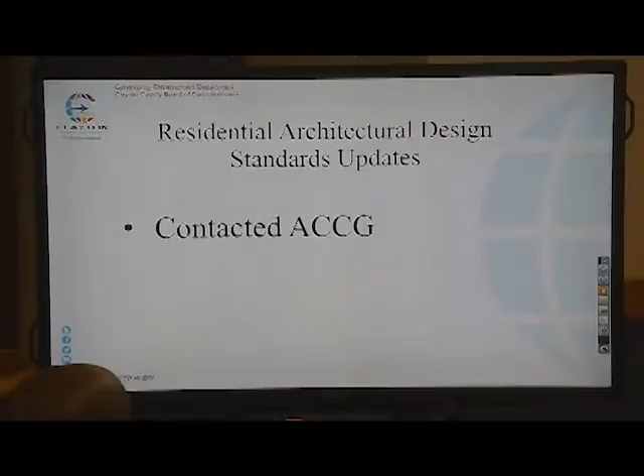Thank you. My next slide is just an update. In the last meeting about ACCG, we contacted them, and in our discussions they shared that they do not get into local jurisdictions' decisions about what they can allow or not allow. All they do is try to make sure the state doesn't pass anything stringent that would prevent commissioners from regulating their own county the way they want. So that was good news, because last time this came up, we had not yet contacted them.

We actually spoke to Todd Edwards, the Deputy Legislative Director. He said the Board of Commissioners has a right to regulate the county the way they see fit, and that they only intervene when the state wants to put in something stringent that limits what you'll do.

So with that, we would like to advertise the residential and architectural standards that we presented to you previously, and it will come to a regular board hearing for approval.

Did you speak with the policy advisor? Todd is one of the folks, but there's a policy committee through the association that has been working on this. The specific ask was to contact them so we can see where they are in that policy proposal, so we're aware as we move forward.

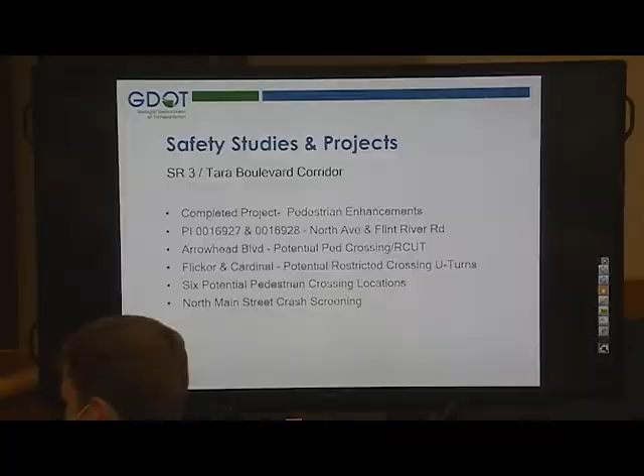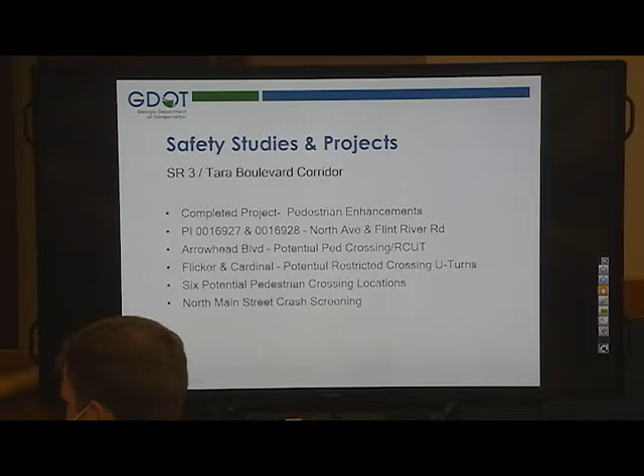There's also 6 additional pedestrian crossings in addition to that Arrowhead Boulevard one that I mentioned that we have designed out, studied, ready to go. I put that study just this week into your engineer's hands so that they can look at it. Again, I don't want to jump the gun on them. I want to give them a chance to give comments on that design and the study, but we're ready to move on those soon. And then there's also the North Main Street crash screening that we did in response to the recent sad fatality that we had out there, the off-duty police officer. So that's kind of a brief overview of crashes and projects we have scheduled to try and counteract them.

This is a good spot to pause before we dive into any of them.

Well, none of what I've seen mentioned lighting. Is that part of the package? Lighting did end up, I believe, on a road safety audit for the corridor that we did.

Lighting is mentioned as an overall corridor improvement. It was brought up as part of an analysis we did for North Main Street as well. I didn't put it in the slides tonight because I personally wasn't 100%, but it's being deliberated strongly, and I just had a conversation today with someone in our state office who can help assign funds.

They're confident that if lighting is something we want to pursue, the county needs to recognize that lighting does have to be paid for, not necessarily install costs, but power costs and maintenance costs by the county. That's usually one of the things that holds up some lighting projects, but we're confident we can start discussing how to get that done.

I'm good in saying that, right, Paul? Well, in my opinion, there are certain areas that definitely can benefit by having some additional lights.

I know for sure there were two mornings when I walked into the office and it was a very similar scenario. A pedestrian was walking along the roadway, wasn't able to be on a sidewalk, and somehow got clipped by a car, and they were both in dark conditions. So we certainly recognize that as a need.

It's not a programmed project by any means at this point, but we can pursue it, and I'm going to write it down right now. Fine with that. Absolutely, sidewalks and lights, absolutely. Paul might have to write it down.

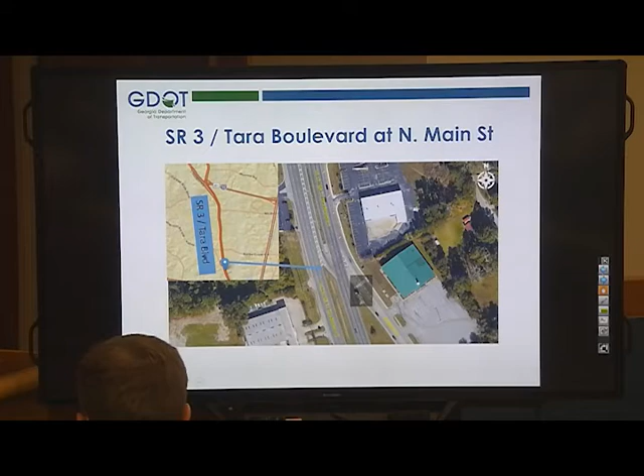So this is State Route 3 at North Main Street, where we had the fatality of the off-duty police officer recently. This is just a picture of the intersection to orient folks here.

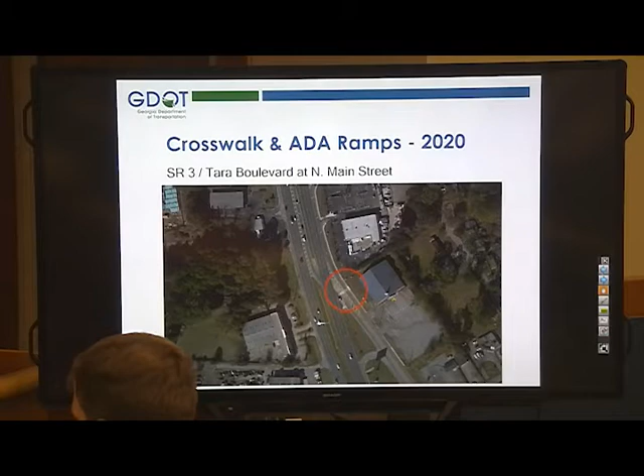This is one of the enhancements I was talking about. We installed curb cut ramps in that concrete island so someone in a wheelchair could navigate it easier, as well as extra striping. There are also signs, not really visible here, that better notify drivers of that crossing. This will not address the crash that happened recently, or many of the severe crashes that take place, but it should hopefully prevent future pedestrian crashes.

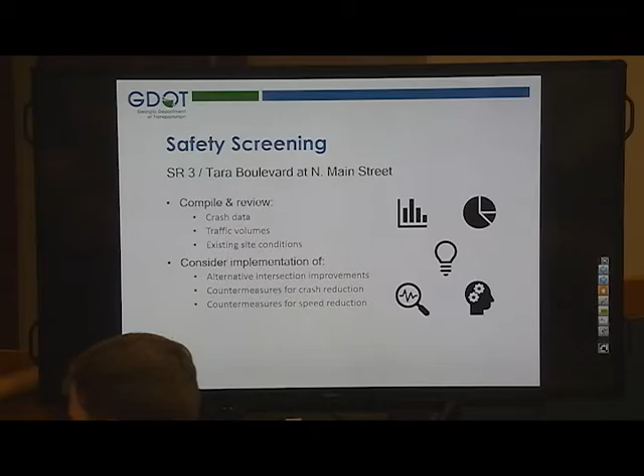This was a safety screening we did. I want to be clear, it's not what we typically call a traffic engineering study that results in a final recommendation. It looks at things like crash data, traffic volumes, and overall intersection conditions to identify feasible solutions and their potential benefits, so we can scope the study we're about to write, and present them to folks like you, to see what you're most interested in pursuing.

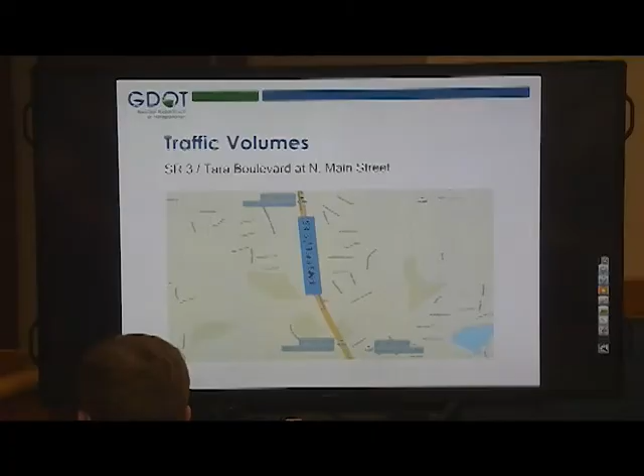So to give you some context on the corridor, I love that you mentioned it's US 19/41. The first time I noticed that on Tara Boulevard, I realized it's literally the same US route as 400, which is pretty telling. Here you can see some of the volumes on the corridor.

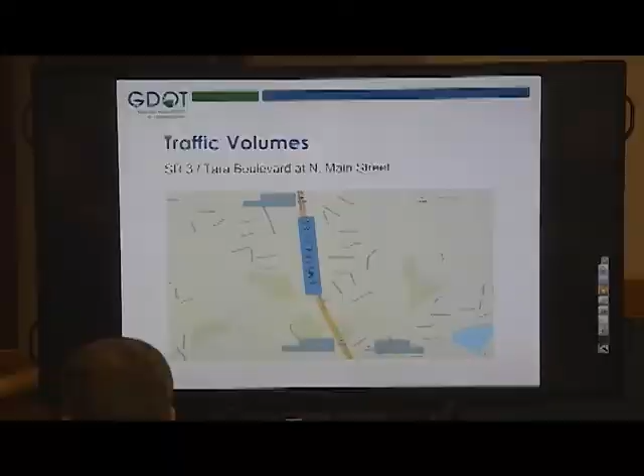On the bottom you see 58,000 average annual daily traffic. On the top it shows 45,000, but I looked into that and that one was a summer count. So we're actually right around 65,000 plus vehicles on this corridor on a single weekday. For relevance, North Main Street is at about 8,000 vehicles per day, which tells you the comparison. 8,000 seems small, but that's above what we'd consider a significant corridor—under 6,000 is a very small road to us, but once you're over 6,000 it's significant enough to accommodate for.

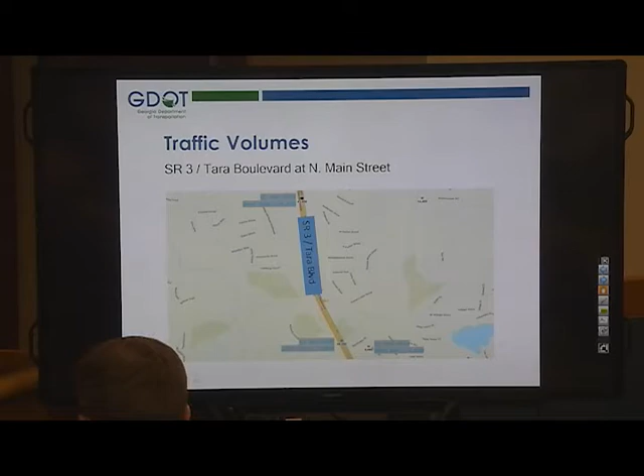On the next slide, here's a crash diagram that we did of the corridor.

There's some things I'd like to highlight. First, you can see they're trying to show little pictures, angles of each crash.

You'll see towards the middle a 32 with the angle crash that shows a left turning vehicle coming southbound on Tara and turning onto North Main Street. One of those was a fatal, the fatal that we all know about, I think.

Also going northbound, there was a rear end crash where you see the 9, and there was a fatal there. We've also got 21 rear end crashes coming on North Main Street, so that's just vehicles trying to merge from North Main into Tara. That's a lot of rear end crashes, a high percentage of the total.

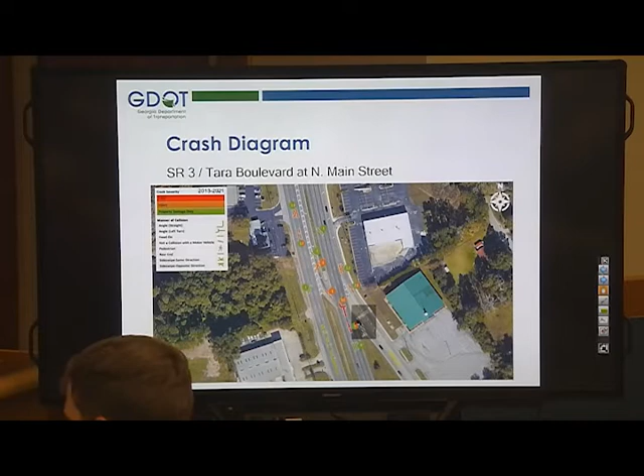There's also a decent number, 12 side crashes just from North Main Street trying to make that merge. That's them having trouble making that right turn into traffic.

On the next slide, here's some more crash data. You'll see there's 32 angles, which is probably around what we'd expect for an average intersection as far as total percentage, and about 118 crashes observed over these 8 or so years.

You'll see 47 were rear end, so that's a significant proportion, especially considering we don't even have a mainline stop here. That's just a lot of vehicles having rear end crashes. And then the side swipes we mentioned as well, just from those right turn mergers.

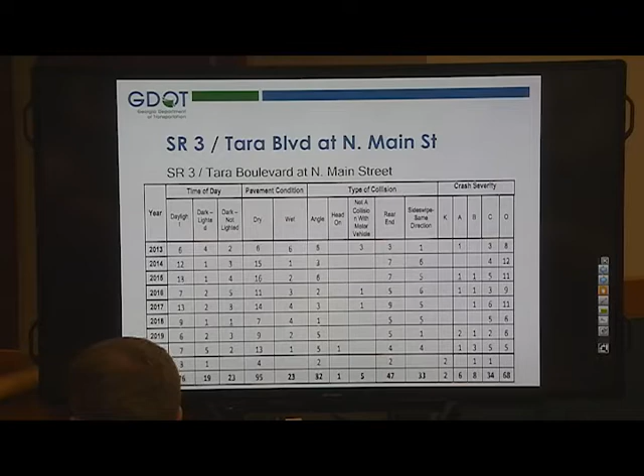So it's showing what that problem is, which I think if you drive the intersection, that's what I feel are the problems. Hopefully we're finally onto some proposed solutions on the next slide.

Some short-term, no-brainer solutions. There's not really any reason to deliberate over these, and they can be installed fairly quickly.

First, we can convert the North Main Street. It's currently a yield-controlled movement. You hop into that lane that eventually, very quickly, is a right turn lane you're forced out of. I drove it semi-recently, almost by mistake - I was always on Tara on the main line, but happened to be on North Main and made that right turn, and that right turn pops up at you.

So what this would do is force cars making that right turn to stop. It would not allow them into that right turn lane and force them to make a conscious decision to enter traffic, as opposed to getting up to speed and hoping they can fit in later. That should reduce those side swipe crashes, and hopefully reduce some of those rear end crashes as well.

We've also got the speed reduction feedback signs we're hoping to place around the district. We've got those on order now, and would place them periodically throughout the district. It would just tell people when they're driving too fast.

Our goal, knowing that when you place those things and leave them for 2 years people start ignoring them, is to place them, pick them up, and place them again, just to keep people guessing. Certainly law enforcement, if they have any speed feedback signs, we would encourage and work with y'all on placement of those.

Long term, and probably the things that are really going to address these problems, we have four ideas. I'll hit them quick and then individually. We could close the southbound left turn lane and still allow the right in, right out at North Main Street.

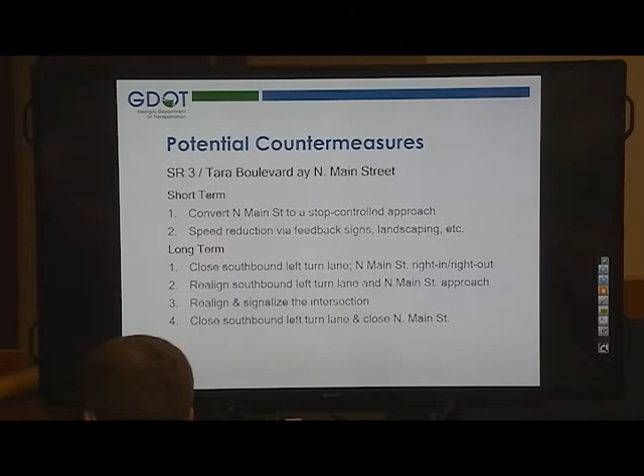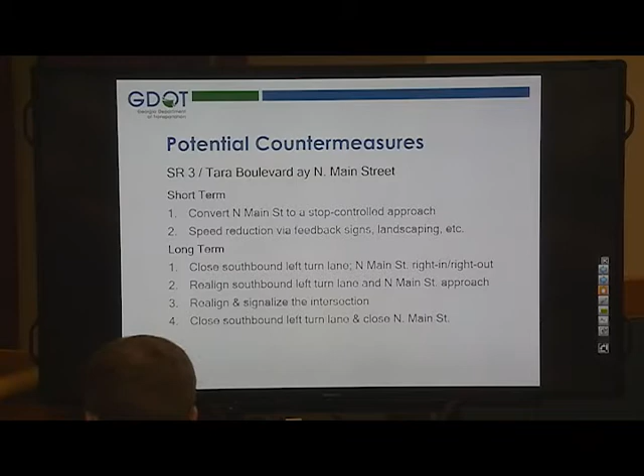We could realign this whole intersection a little further to the south, which would again make that right turn from North Main Street more of a conscious decision, as well as allow the left turners more visibility. We could also realign the intersection and signalize it. And finally, we could consider closing both the left turn and North Main Street outright. We'll jump into each of those on the next slide.

Before you go to the next slide, on the considerations, is there a process for consideration for the realign or closing it? Does that come from the board?

It would be primarily, for our side, a traffic engineering study that would analyze a lot more than what we've brought today, but certainly the board, if y'all wanted to sit down as a county and discuss and talk about what you feel are feasible solutions, we could eliminate a solution based on that, or possibly put some preference to a solution depending.

Based on the cost of some of these future long-term countermeasures, we will need buy-in from the public because we're doing realignments and potentially closing off some approaches. This would turn into more of a longer-term project, so that's something we'll coordinate on with county staff.

Okay, thank you. We're going to skip ahead to Flicker and Cardinal. If you go forward about four slides, we can talk more about those solutions.

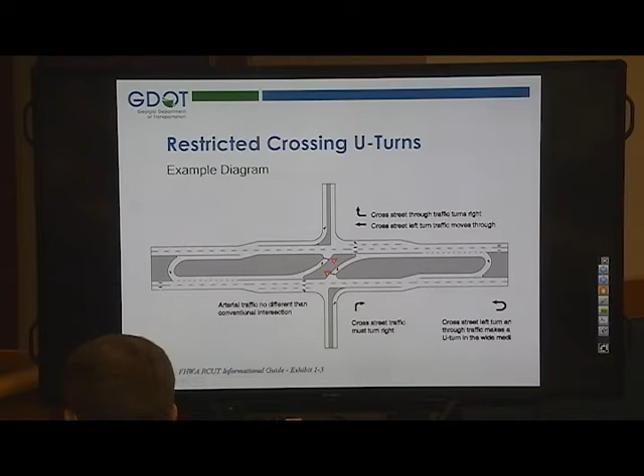If you need to go across, you turn right, make a U-turn, then turn right again. That's what we're about to discuss at these two intersections, more toward the south of the corridor on Tara, in a residential area between Tara Road and McDonough Road: Flicker and Cardinal. Both are existing full access median openings, meaning you can turn left off and left onto the corridor.

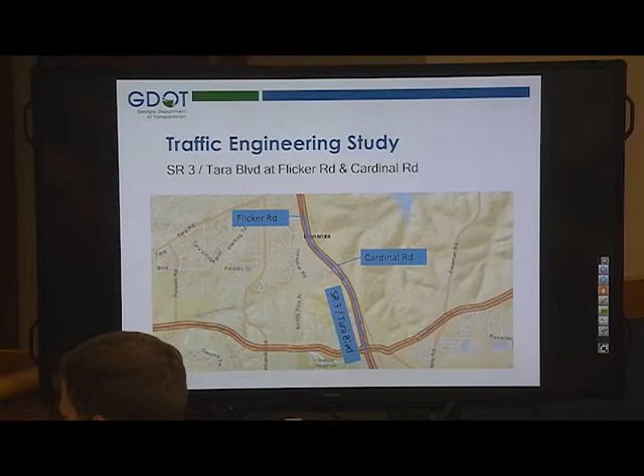On the next slide we have one of the designs—this is Flicker Road, and you can see it's actually a very simple modification. We're just going to take a little bit of concrete and put it in the middle of the intersection to prevent those left turners, and round out the nose points on the medians to discourage the left turn across. It would still allow vehicles currently southbound on Tara to make a left turn or U-turn there.

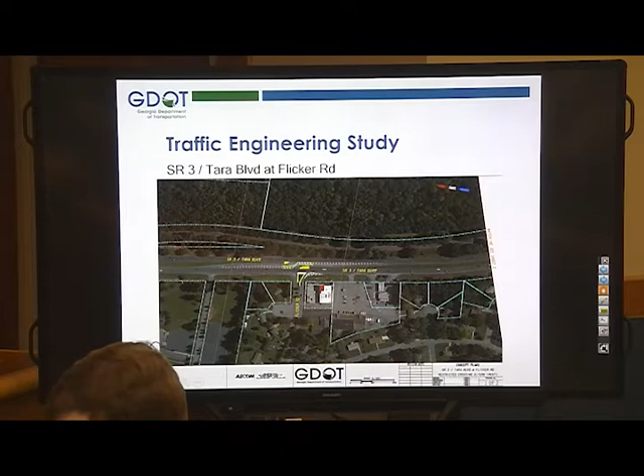If you're turning right from Flicker, the next design at Cardinal shows where they would end up. You can see they would come down to Cardinal, which is about a quarter mile, maybe a third of a mile, to that intersection where they would turn around and make a U-turn.

That's a little more travel distance for commuters, but we're predicting a significant reduction in severe angle crashes. This design also does the same RCUT median restriction at Cardinal, but provides a U-turn immediately after the median, so these drivers would be less impacted in regard to travel time.

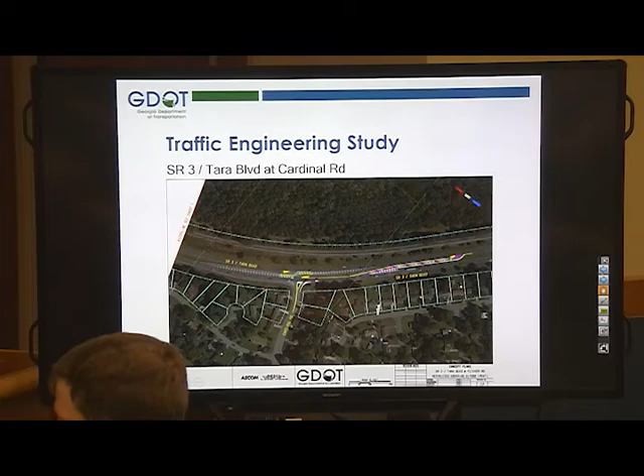We performed an intersection control evaluation that indicated these were very good solutions, providing a high benefit-cost ratio to drivers. We sat down with a couple of your engineers and discussed that there were extra details we should put into a more thorough study, in case the community questions why we moved so quickly—that was the reason for the delay. We expect to have that study by the end of August for your engineers to review, as well as you. So that's the RCUTs, if you have any questions on them.

The pedestrian hybrid beacons we talked about—hopefully you're familiar with them. They're pretty simple devices: traffic signals designed solely for pedestrians to cross the road. They stop traffic in both directions with a wig-wag flashing red, then a solid red to tell cars to finally stop, allowing the pedestrian to cross. Yours would have very large medians in the middle providing a pedestrian staging point that actually increases safety compared to what you see here.

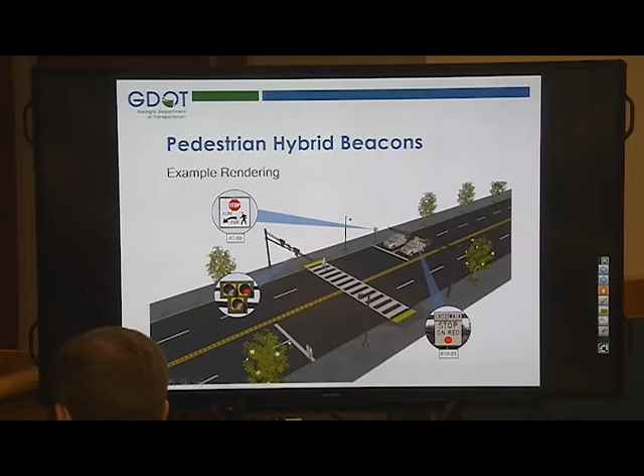These are the seven locations, including Arrowhead, that we identified. I know they're very small on the map, but they're listed here for you. They were all identified first by looking at pedestrian crash data, so this is a data-driven process—it's not preferring any specific road, community, or business. It's very much where pedestrians end up in collisions a lot. From there we also set up pedestrian counters and video cameras, then went back and counted them by hand to identify where the most pedestrians were.

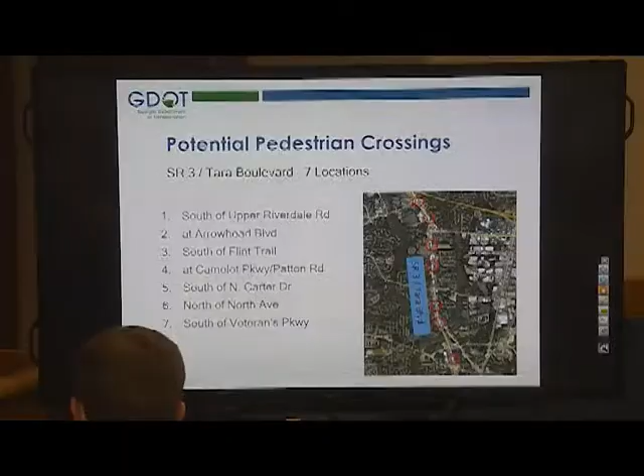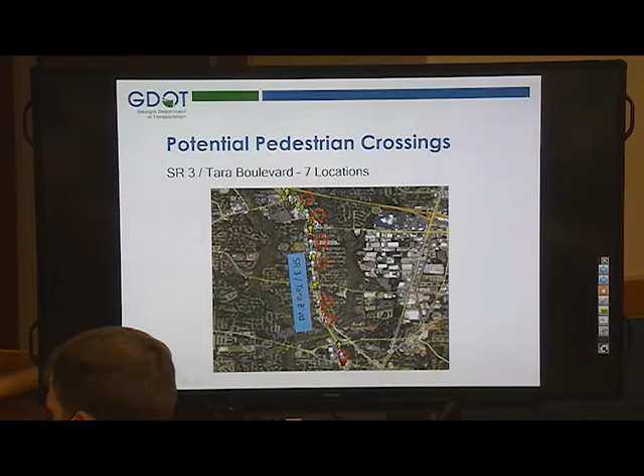And so that's how we ended up at these locations. We believe that these would do a very strong job of reducing pedestrian crashes and give drivers better notification and pedestrians more options. So from here we have 2 of the designs, just plotted out to show what we had. We've got a lot more in-depth data, but it shows the green pedestrians are those hit but not injured, and as you get to red, fatalities. So we took that all into account.

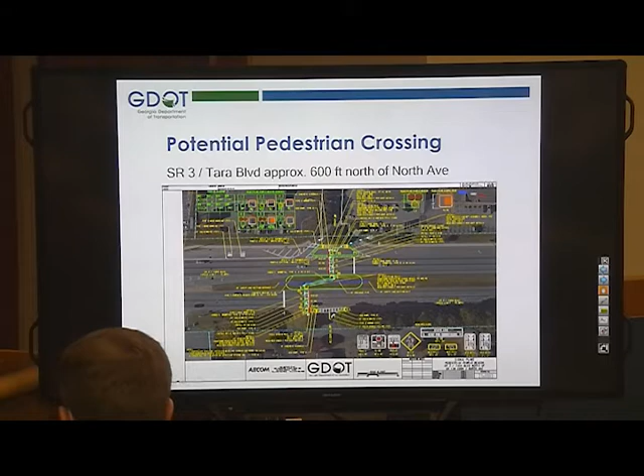Next slide. This is one of the designs, over near one of the Kroger driveways, just north of North Avenue. You can see how it crosses the median there. It's a pretty cool design. It forces the pedestrian, after they cross the roadway, to turn right and look at the oncoming traffic so they don't get struck on the second crossing. But that's really what we have for you tonight. This is great work. Any questions?

I want to say thank you. I know there's much more to be done, but what you all presented tonight is huge. I know a lot also depends on education, as we've talked about in the past, and hopefully we can partner with MARTA as well as with other organizations to drive safety home, so we make sure folks aren't taking risks with their lives, but also know we're dealing with the structure of the road to make it safer. It really lets us know we're doing what needs to be done.

We know this is a state and U.S. highway. It still needs lighting. Even with this work, we've got to have contiguous sidewalks and lighting. We just have to dig deep and find the funding sources. Hopefully this board of commissioners can partner — I heard clearly in our conversations, and thank you for being candid, that in Rockdale County they had a ribbon cutting because they got together as a board and made it happen. So hopefully we can do the same, and explore all funding options to make it happen, not just for the lighting, but also the beacon lights and continued safety.

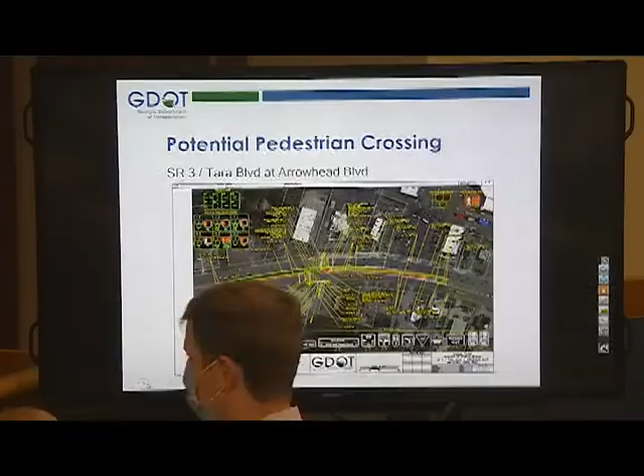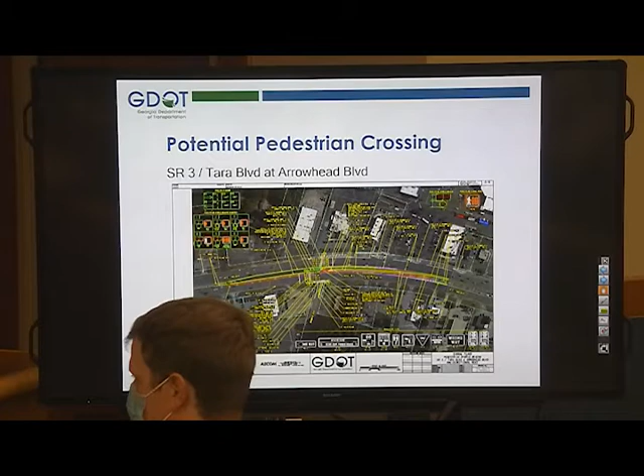Commissioner Hamilton — actually, the next slide, is that for Arrowhead? This is kind of what I was referring to earlier: a potential R-cut, just one directional. What you get with that opportunity of the R-cut is an easy way that all those vehicles are already stopping to allow the left turn, so you can cross the pedestrian as well. This one is a little less certain based on when we analyzed it.

It's going to cost a little bit more. The grading between Tara there is like this. So it's going to cost a little bit more. It's not a project we can do with our quick response funding immediately, but it is one that is very high on our list. I don't know if that lines up exactly with where you're talking about, but it's certainly something we can look at.

And just to speak to MARTA, we have worked with them. They've worked with us to realign bus stops to crossings that we can make work on our roadways. So that's certainly something we'd love to partner with them on.

Awesome. So Justin quickly mentioned this quick response project. Please come up to the mic so we can get it recorded, Mr. Chair. I was just saying that Justin mentioned the quick response projects.

So some of these we will be able to address using that funding source, and we will be able to get them done a little bit quicker than others. Others, of course, are going to take a little bit more time and more assistance from our consultant. But some of these projects we'll be able to get addressed relatively quickly and get some solutions out there so that citizens can see that you guys are actually addressing the issues that have been brought before them. And that safety is very important.

We talk about lighting a lot. You guys know there's a $1 trillion transportation infrastructure bill out there. We don't know what the final bill is going to look like, but there may be some opportunities to find funding for U.S. highways for things like safety. Safety is important when it comes to transportation, and sometimes they do put special pots of money out there just for that.